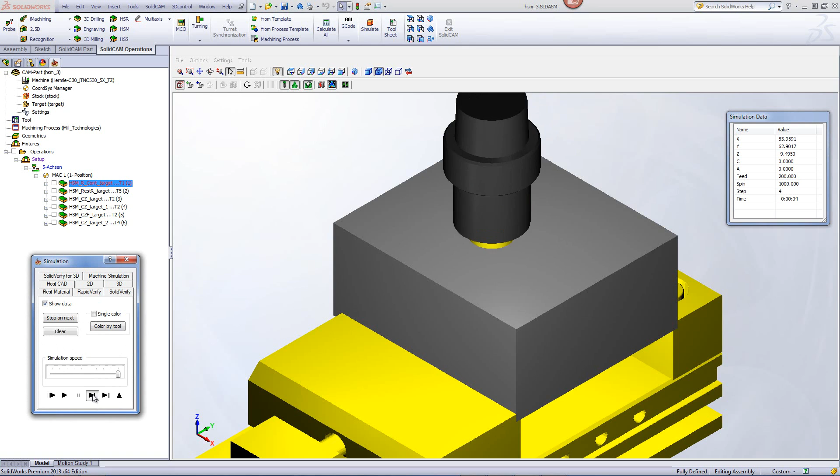If we go into our passes area, you'll see we're leaving 0.5 millimeters for the finish cut, and we'll be going down every 10 millimeters to take out, again, the bulk of the material. If we take a look at the simulation itself, you'll see as the tool goes in, it works around the part. And when it goes down to its next step, you'll note that we have a wide step over here because of the tool clearance.

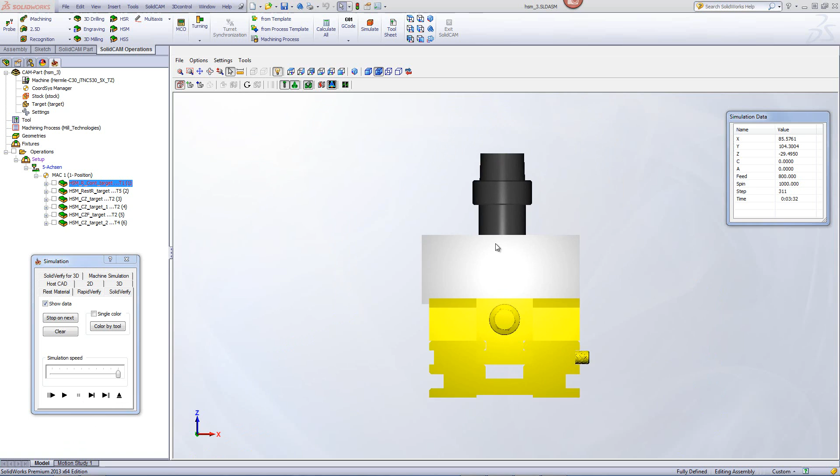If we go a little further and we take a look at the side view of the part, you'll see that our holder is actually inside the part itself, and it's just moving over because of the tool holder clearance, going down to the very end of the part, leaving large steps for our rest rough operation.

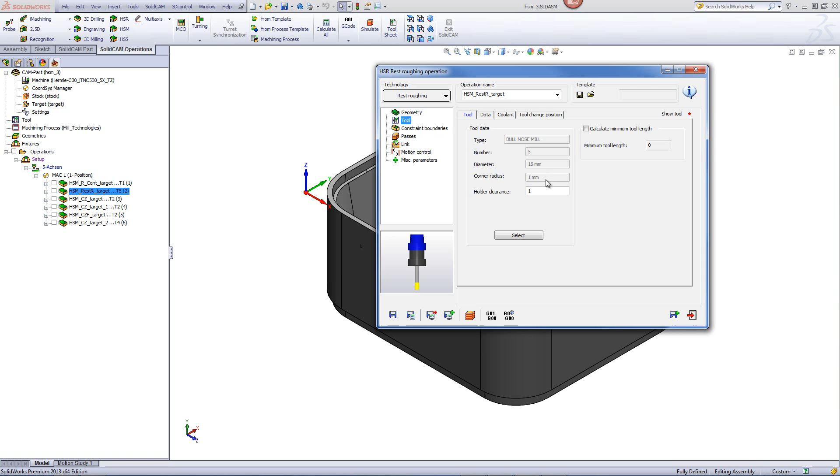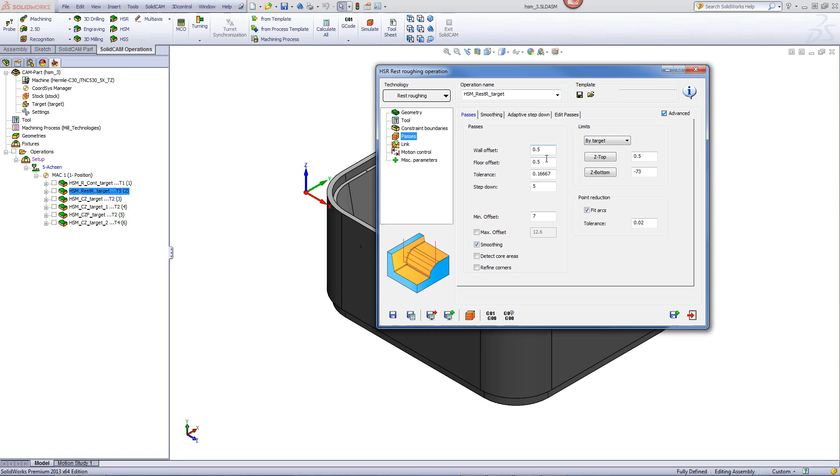In our next operation, we'll begin doing a roughing operation, but we'll be using the option of rest roughing, and this time using a smaller end mill of 16 millimeters with a 1 millimeter radius at the edge. And the tool will be outside of the holder by 30 millimeters, allowing it to go even further down into the part itself. If we take a look at our passes area, you'll see that we will again be leaving a 0.5 millimeter offset on the part itself, and this time going down every 5 millimeters.

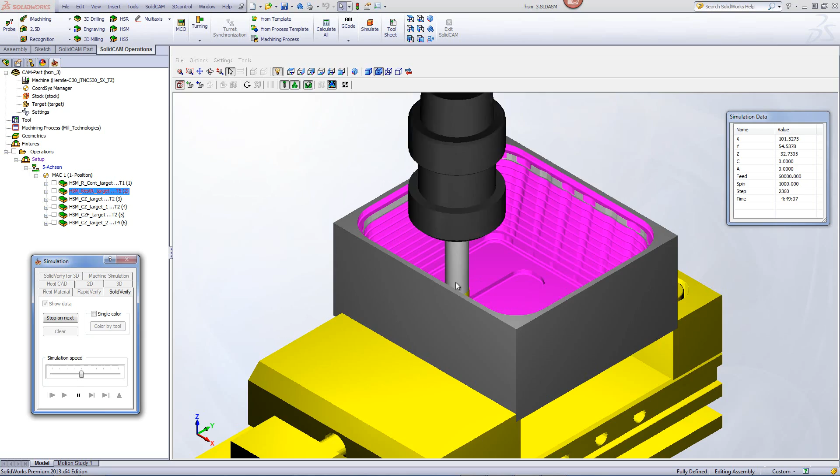If we take a look at the simulation, you'll see that the tool is working only on those steps, clearing off those steps as it's going further down into the part itself, and only working in those areas until it gets to the very bottom of the part, and also cleaning out those pockets which the larger end mill could not work in before.

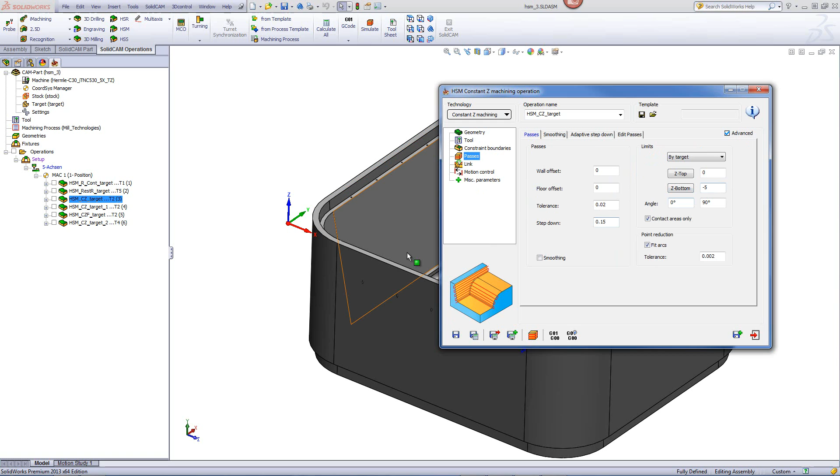From this point on, we'll be doing our finishing operations, and we've broken this down into several different areas. Our first area that we're working on is the top flat surface over here. And if we go into the operation itself, you'll see that we'll be using the option of constant Z machining. The tool will be a 12 millimeter bullnose end mill with a 0.5 millimeter radius. And if I go down to the passes, you'll see that we'll be going down every 0.15 millimeters, and we'll only be going down 5 millimeters into the part up until this step as shown over here.

If I were to take a look at the simulation, you'll see that the tool will be working around this area over here up until that particular surface only, not going any further down on that material.

Now, in our next operation, we'll be using the exact same tool as we did before, the 12 millimeter bullnose tool with a 0.5 millimeter radius. But if we go into our passes area, you'll see that we'll be working between the depths of -62 and -72. In other words, we'll be working from this surface up until this surface over there, only working in that area. Again, stepping down every 0.15 millimeters. Taking again a quick look at the simulation, you'll see that the tool works exactly in those areas only.

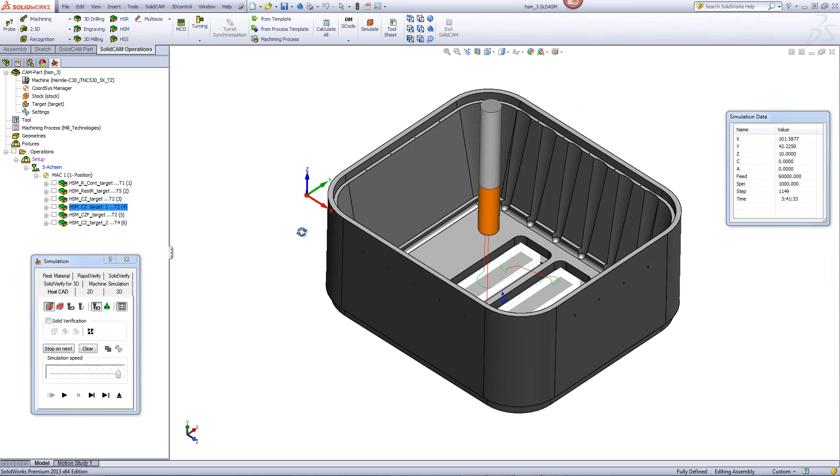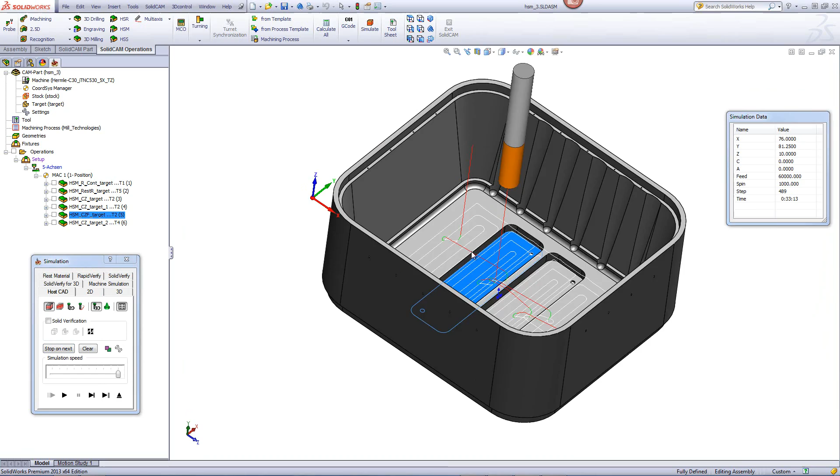In our next operation, we'll be doing a horizontal finish on the part, working only on the flat floors of the part itself. If we take a look at the tool, we'll be using, again, a 12 millimeter bullnose tool with a 0.5 millimeter radius. And if we go into our passes, you'll see we'll again be working on the lower areas on the bottom over here, on this surface and on this surface over here. If we take a look at our simulation, you'll see that the tool will only work on this area and in this area alone. No other areas were machined.

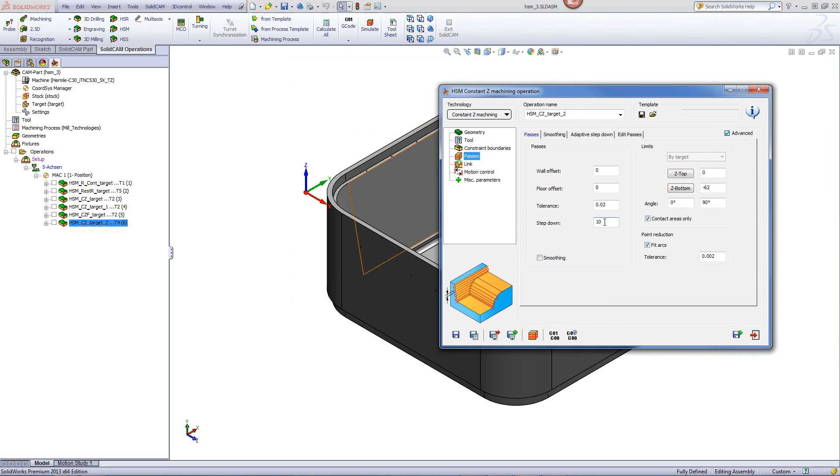Now, in our final operation, we'll be working on these tapered walls around the part. For that, we've used the option of constant Z machining, and since HSM also recognizes tapered tools, we'll be using a 12-degree tapered end mill to machine out those walls. And since we are using a tapered end mill, in our passes, we can take large step downs of 10 millimeters on the part itself. If we take a look at the simulation, you'll see that the tool will work exactly on those tapered areas, stepping down every 10 millimeters as shown over here.